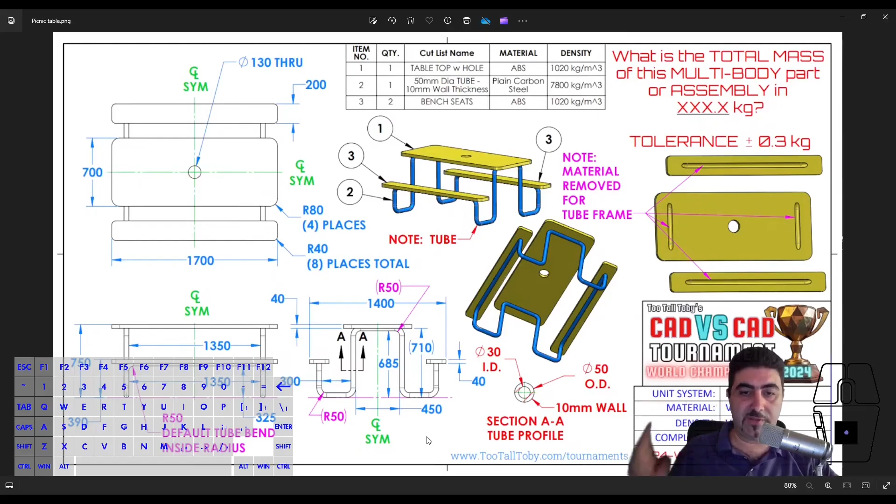So I'll just put this here on the side, and we're going to start a new assembly. I'm going to call this the picnic table—well, the TooTallToby World Championship picnic table. And we're going to start making parts.

So I'm not going to be inserting any parts, of course, I will be making them. So these are the benches. By the way, in a speed modeling setting, I wouldn't be naming everything. I tend to want to put Solid, that's my style, at least when I'm competing—you can check by my successes in TooTallToby's competitions that this might not be the best way to do it. But my style is let's start putting solids in there.

So I would start in the XY plane, and put a couple of rectangles for the benches. I want to make these equal there and there—sorry, there, these are equal. This is vertical, and then this is midpoint with 3 points, so okay, then I want a midpoint here as well. Now, dimensions.

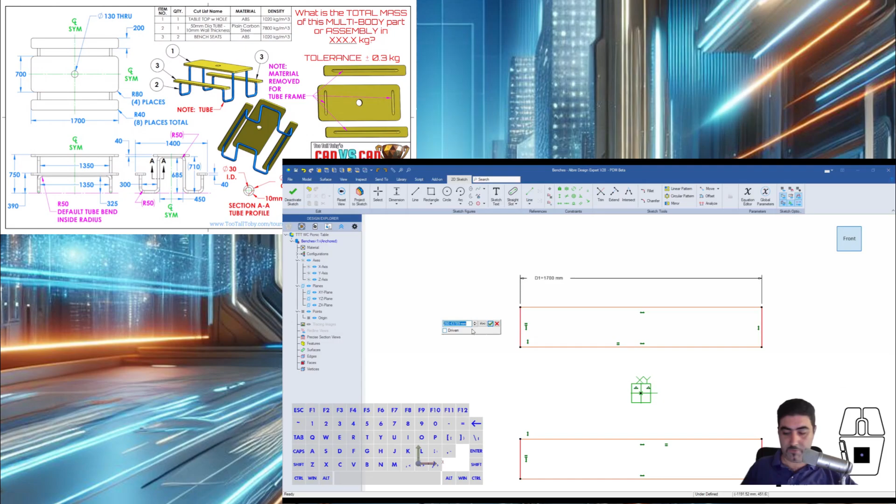So this is 1700, and this is 200. And what's the outer one? Well, the outer one is on the bottom in the center of the sheet. In that view it says outer to outer is 1400, and it also tells me that these are 40 millimeters thick.

Okay, so now I can start filleting, and the fillets are 40 millimeters. And we are done with the benches for now.

So now I want to do the tabletop. So we want a plane. Now we can see, bottom left, the top of the benches is 390 from the ground level, and the top of the table is at 750. Now what that tells me is subtract them and offset my plane, that should be fine. So I'll just say here, 750 minus 390, and that's where I'll design my tabletop.

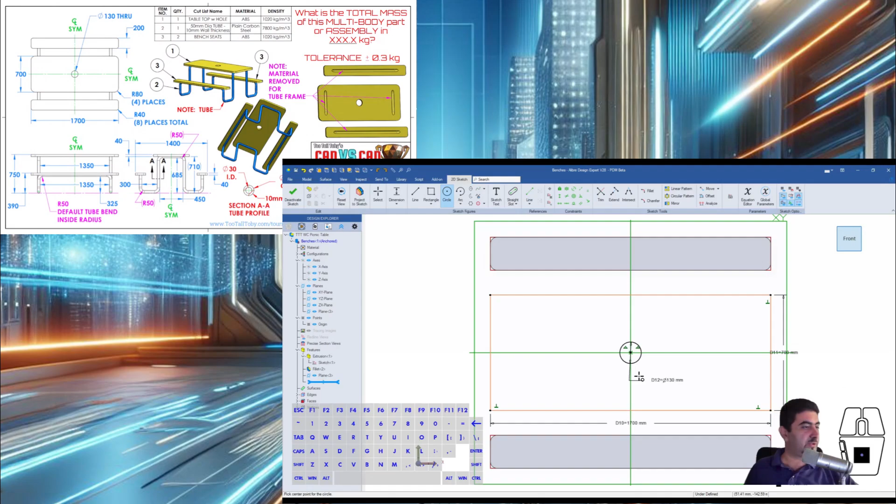So my tabletop is a center rectangle, which is also 1700, but 700 this time, and it's got a 130 millimeter circle in there. I'll extrude that for another 40, and then I'm going to fillet it.

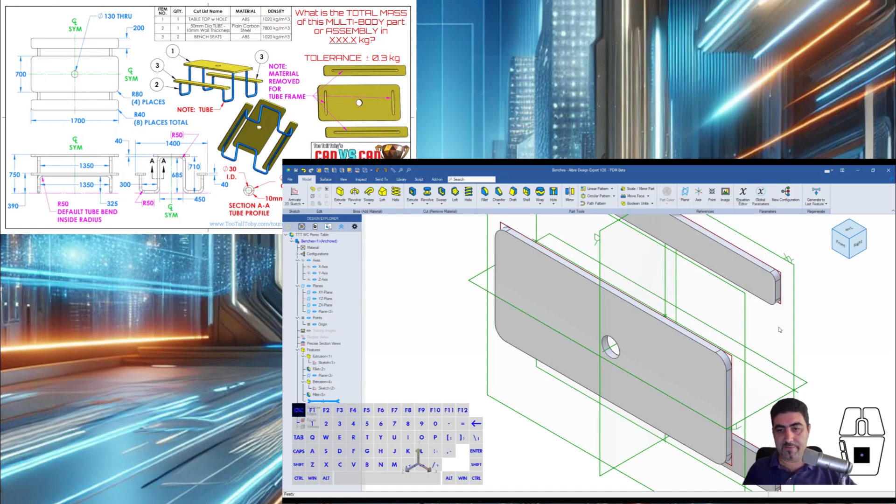Now, in speed modeling, I've come to the conclusion that this is a slightly faster way to fillet, so this is how I do it: you select the edges first, holding down Shift, then you open the fillet, type the number—oh sorry, it'll be 80 this time—then hit Enter, and you're done. You just filleted everything. So this is the benches and the table done.

And they're anchored because I didn't insert the part. I created a new part, and it was the first part of the assembly. So Alibre automatically anchors them, which is fine by me. That's how I want it.

Okay, so now I'll go back into the assembly, and now I want to be doing the tubing, and that is the hard one, right? That's the difficult one. Okay, so how do I do that?

Let's see, if all of the fillets in the tubes are the same, which they are, you can see that the fillets in the tubes are marked with a purple R50, and in the bottom left it says R50 default tube bend inside radius. Inside. So all of the bends in the tubes are the same.

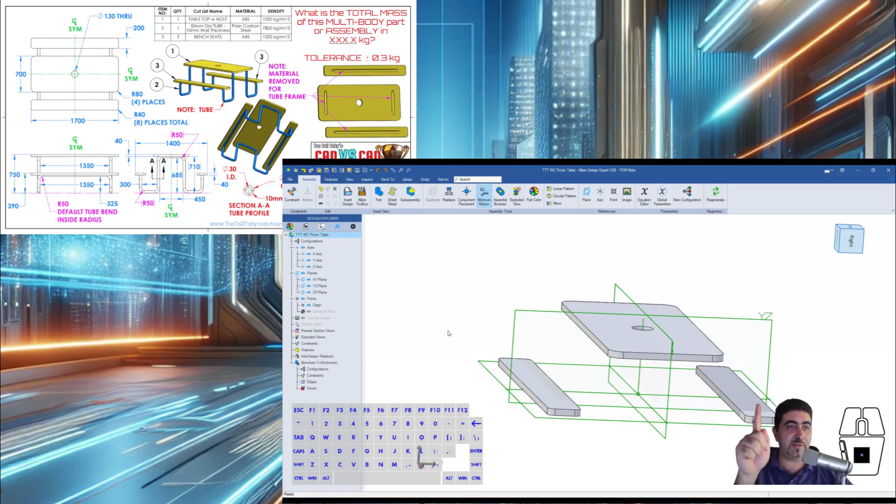Seeing that, I would just go for a 3D sketch. You know, honestly, I just go for a 3D sketch. But we need to pay attention here, because I'll be sketching the center line. What this means is that the center line for the bend is not 50 millimeters. It is 75, because 50 is the inside radius.

So let's do some 3D sketching, and before I do that, I need a plane to start on. Let's see, bottom left we have 1350 between the legs inside dimension. That tells me the center line is at 1400 millimeters. So I'll make a plane here and offset it by 700. That's where I'm going to start my 3D sketch.

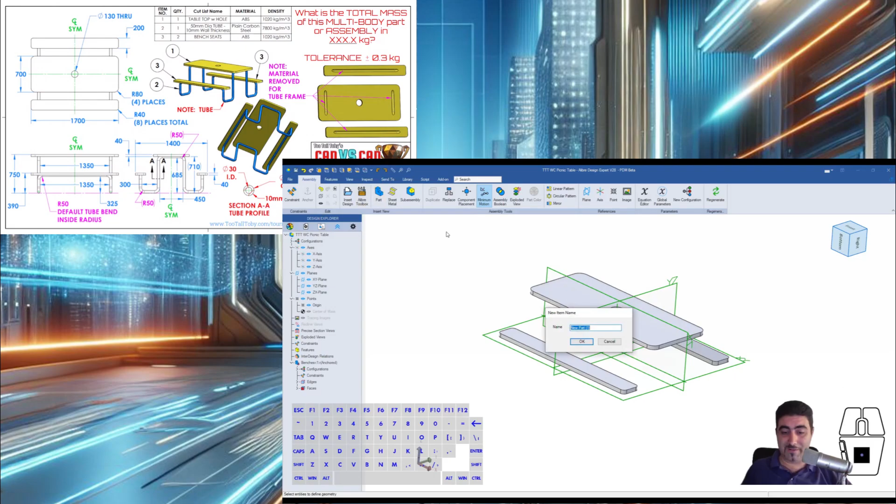Sorry guys. Now this would have cost me a lot of time. In a speed modeling situation, I need to start a new part first and then do all of that.

Okay, so now I'll come in here and 3D sketch. And if you remember my video on 3D sketching, we always need to have the grid on, and we always need to have the elevation window showing, which I will put here in the center for you. You might not be able to see it very well, but if you want to follow along, you can look at your own elevation window.

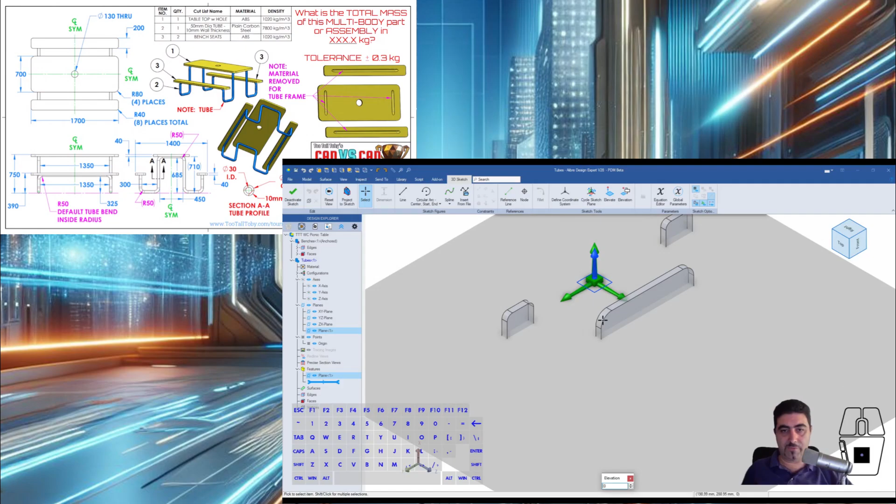Okay, so I'll just draw a random line. I'm going to make one point coincident to the origin, and it's way back there. And then I want to make that line parallel to the x-axis. Okay.

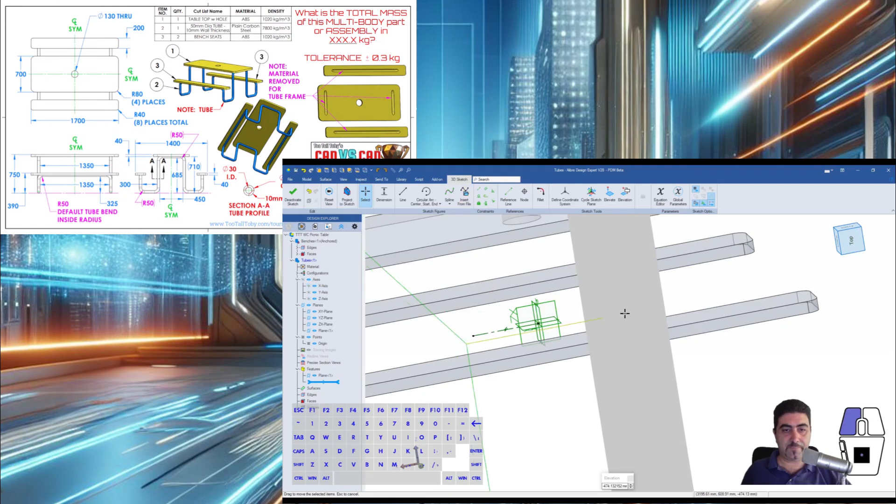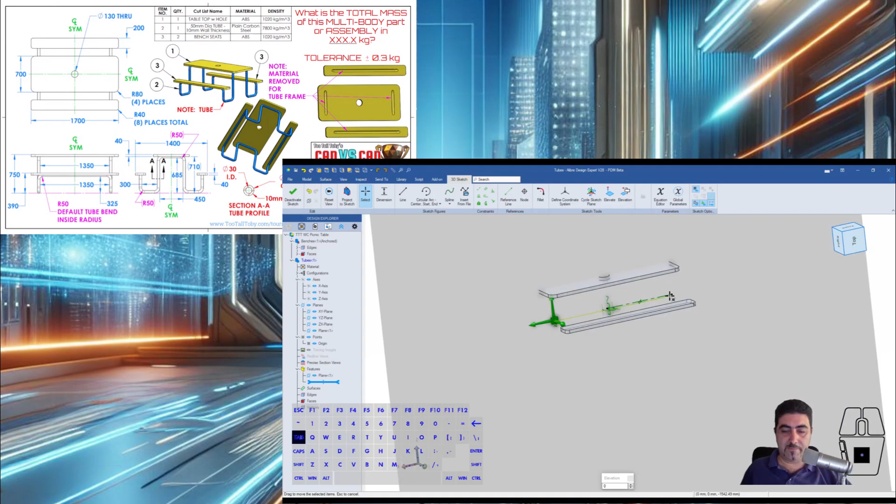Cool. Let me switch my plane so I can move this. Now I can move it along this plane. By the way, the reason I created a plane is because I want to start from here. So I was going the wrong way, right? So you need to switch planes to move things. Okay, there we go.

And now I can dimension this to be 700. Okay, that's cool. And then I'll click there, go straight up. So I need to dimension that now to be the difference between the bottom of the benches and the center line path of the tube.

So we need to check our print again, right? The bottom of the benches is at 350 millimeters from the ground. And the center line of that tube in the middle, right up there, is 685 plus 25, so that is 710. So what I'm going to say here is I'll start the dimension and say 710 minus 350.

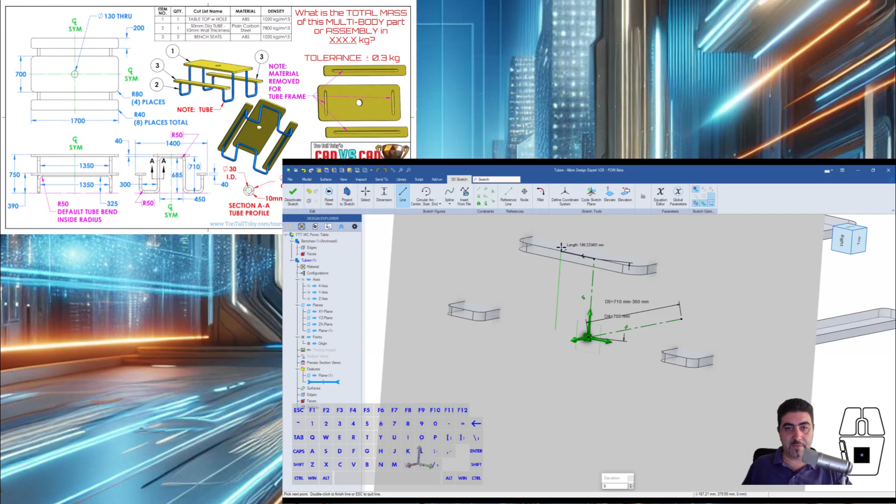And that's where I can now start sketching actual geometry lines. Let me put it to one side. Okay, now I can start doing lines. So I'll click there. And you know what? I will hide my benches. Okay, I think this is easier. I don't want to be snapping to random stuff.

So let's go there, and then to the top, and then I pick that up. And I'm doing this little circle and then picking that point, and you see that the elevation just snapped to the number that it should be. By the way, you know what, I'm not going to gimp myself.

I'm just going to dimension all of this first. So I'm just going to dimension everything first, because I want these straight lines to be in the correct location from the start. So now I'll be dimensioning this.

This is half of the width of the center line. We already discussed why that's 500, so that's 250. Okay, and then these two are vertical. Yeah, they are, they already are vertical. So that is then a height of 685.

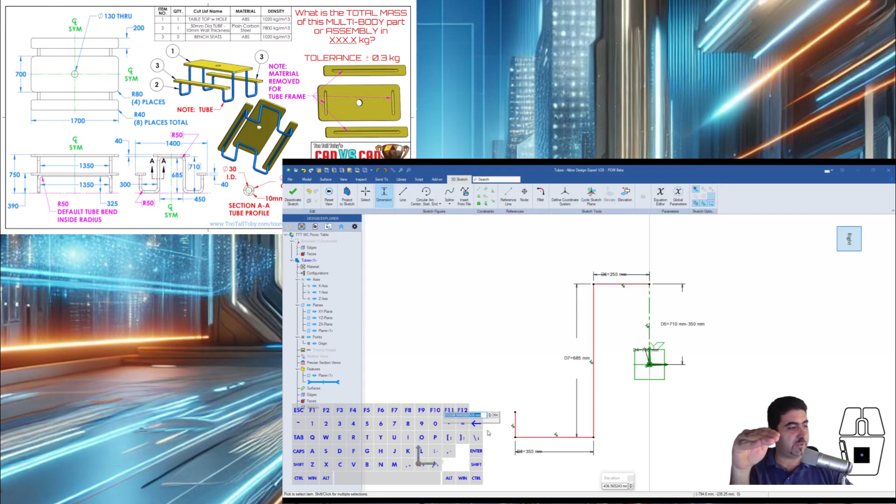And then I need to dimension this height. I'm going up again. So now I'm getting a dimension from the ground, right, to underneath of the tube. Okay, so that's 325 again, exactly, right? Because the bottom of the tube is touching the ground, so that's below to below. So you just shift that.

That's the correct one. Okay, so now what I'm going to do, now I'm going to just make a line here. Make sure that it's in a primary direction that's perpendicular to the other ones. And I will just say that this is, you know, D4.

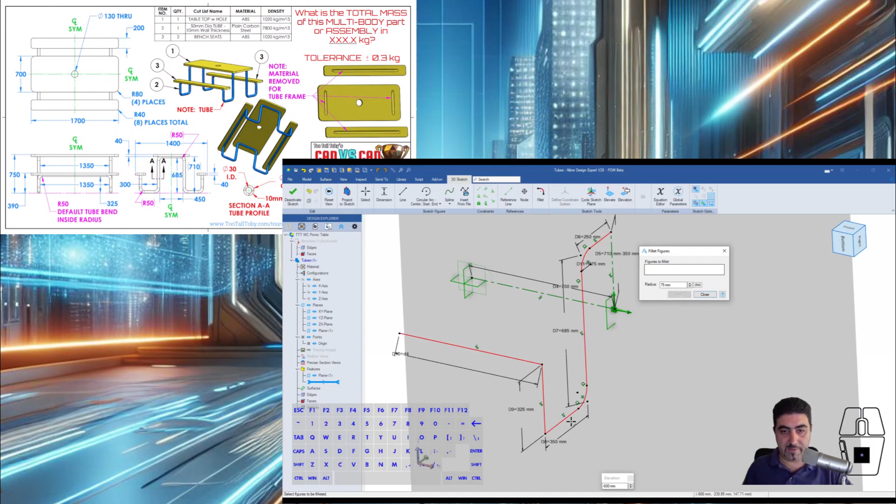Okay, and now I'm going to fillet everything. And we said that we want a fillet of 75. So I'll just type that in, go in here and say apply, apply, apply, and apply. Okay, so I'll close this off.

While it is selected, I'll open up a plane. It'll snap it to the middle, because now when I sketch on this plane, I'm getting an origin which is at the point that the sketch I used is piercing that plane. Right, so this is a sort of poor man's piercing constraint.

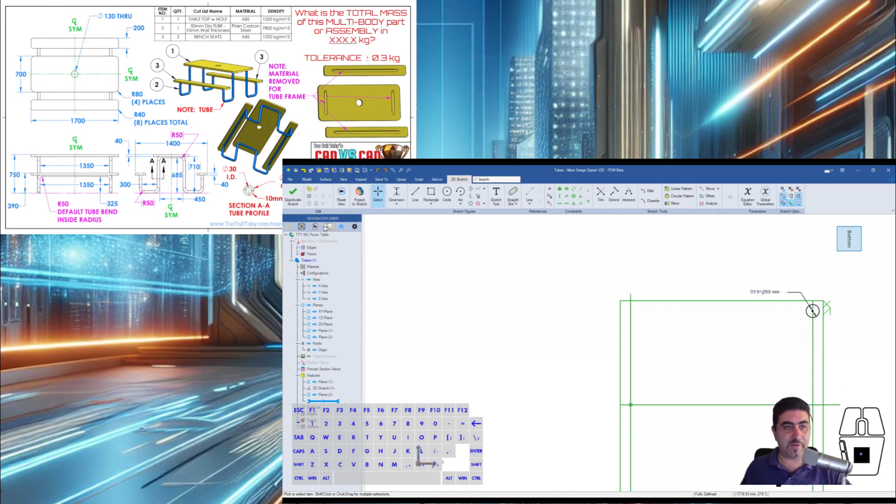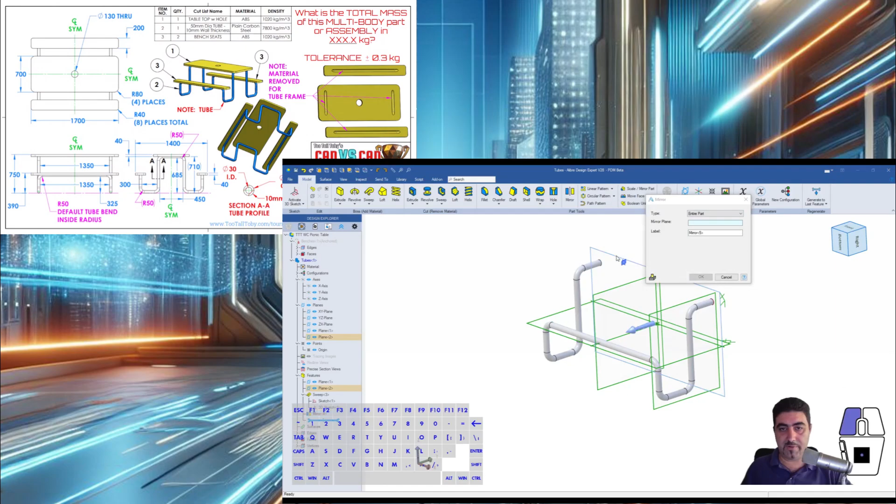And I'll do a tube of 50 millimeters, right, and not do the inner diameter yet. So I'll just do that. Sweep, select this. So I've done a quarter. Now I'll mirror the entire part there. And now I'll mirror the entire part over there. So these are my tubes done.

Now I'll bring the benches. I'll show the benches again, okay? And they're interfering like they're supposed to. So look what I'm going to do now.

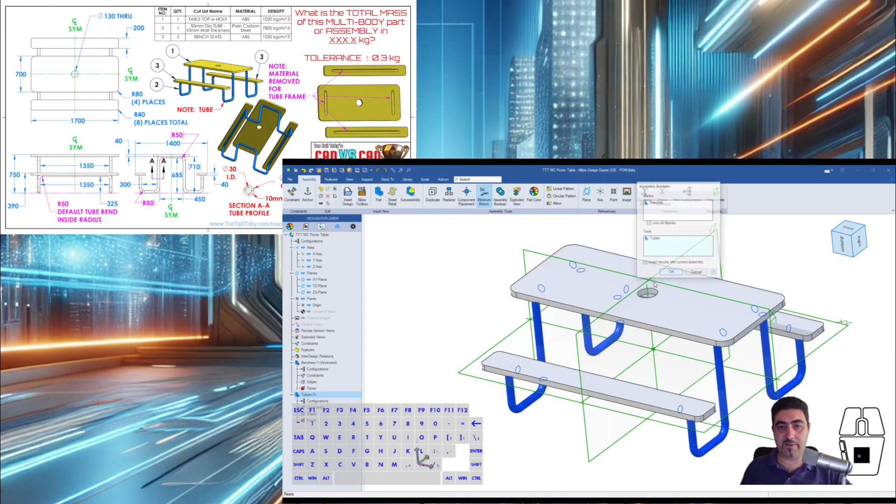I'm going to do an assembly Boolean, okay? So which one is the blank? Well, the benches are the blank. And the tool, well, the tube is the tool, okay? And I'll check that I want to insert the results of that into the current assembly. So I'll insert that. This is the assembly Boolean. Now look at this.

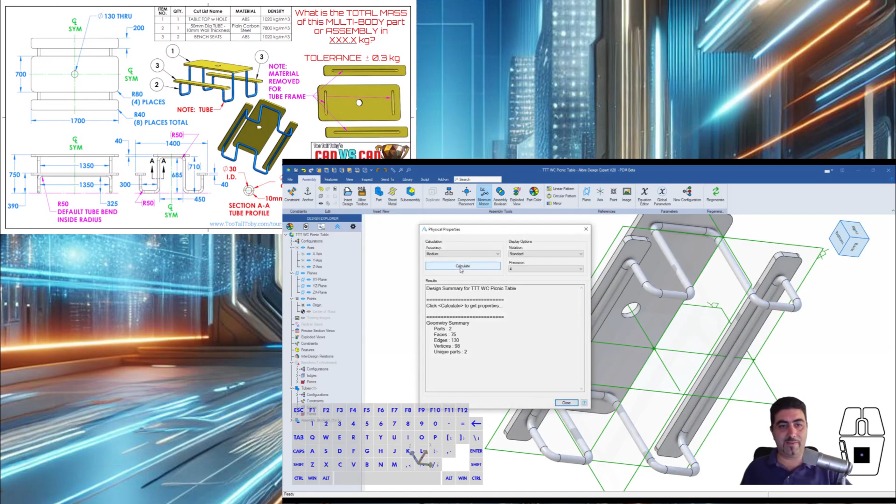I will be suppressing the original benches. Okay, looks like nothing has changed, but now if I hide the cubes, my cuts are in there and they're perfect. So now I can calculate that this has a mass of 87 tons.

Oh man. Now we need to go in here and assign some materials. So the benches, the material I need to assign is ABS. Cool. And for the tubes, look, for the tubes, right?

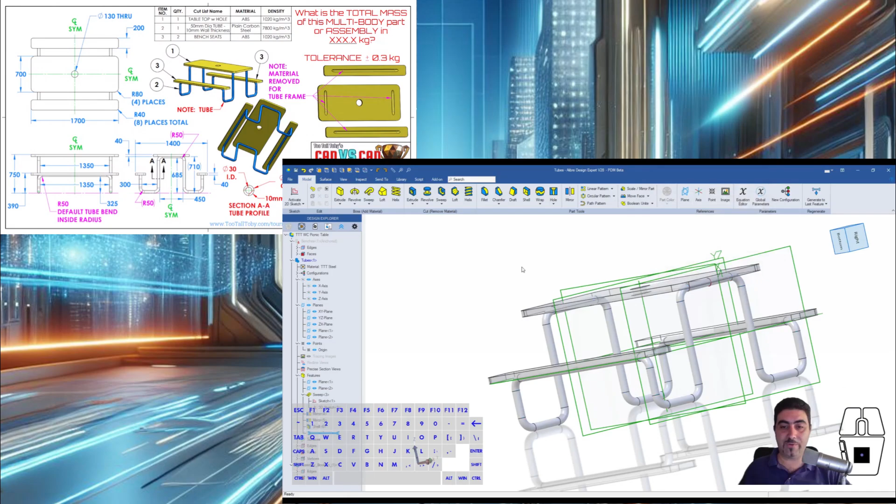I need to assign the material that it is steel, and then I need to shell for 10 millimeters without removing any faces. So if I click OK, now let's see what really happened, right?

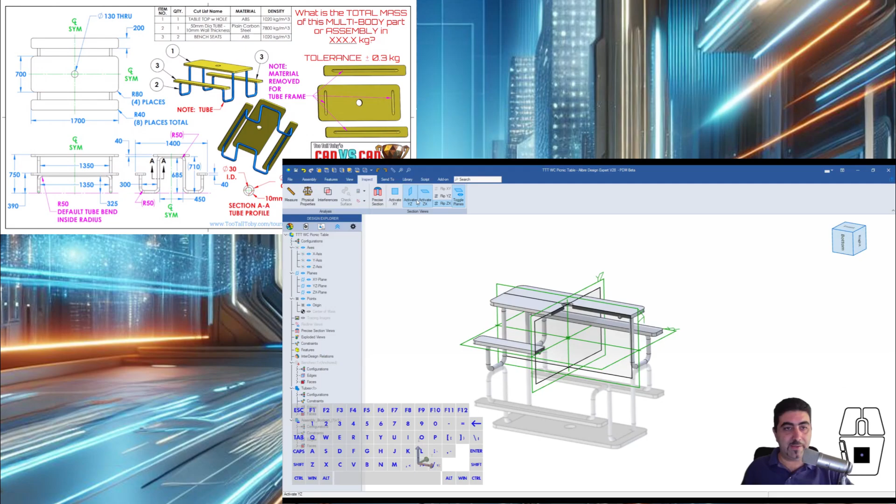So let's make a cut along the ZX plane. Flip it. There you go. It is now a tube, right? Because I shelled it, but I didn't remove any faces. So now it's a continuous tube, and, you know, same here, right?

Same deal here. So now I can actually check the mass, and the mass is 157.4, which, if I remember correctly, is the correct answer.

Now the next part we'll be doing is these weight wheels, right? And I was blown away.

I wanted to do that so much, but unfortunately, Chris, who got to the final, knocked me out in the first round. Thanks for that, Chris. By the way, his YouTube channel is Fully Defined.

Check him out. So what are these? These are weight wheels, right? And there are 3 of them, and you need to come in with the weight of all 3 of them.

And there's a very handy note here on the bottom left that says these are the only dimensions that change. So it's the outer diameter and the thickness. So this inside fillet, this angle here, and the distance from the inner wheel all stay the same.

So how would you go about drawing this? Well, we have this very, very handy section here. So, I mean, this is like telling us, look, start from there. So I will start an assembly, and this is the trick here, right?

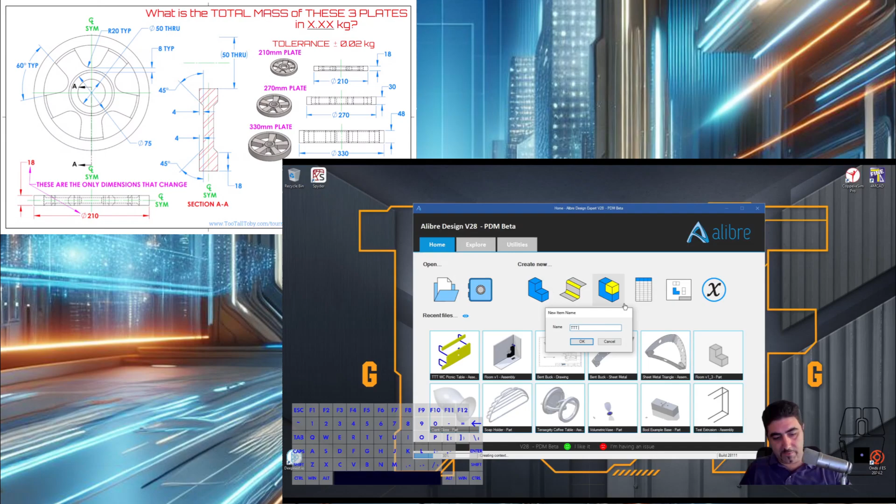I'll start an assembly, and I'm going to call this TooTallToby World Championship Weight Wheels. So again, not inserting anything. I'll start a new part, call it weight wheel. Okay, and I'll start sketching here on the YZ plane, and I'm going to do this.

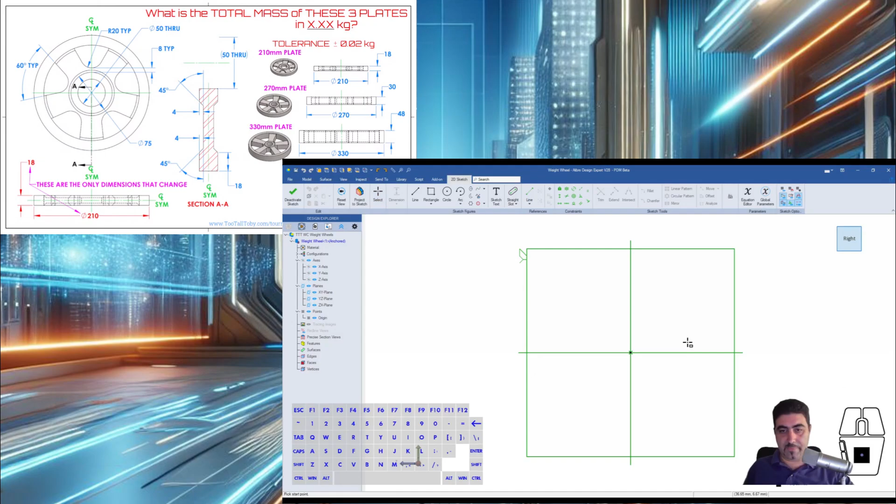I'll start a rectangle, make these 2 into reference. I'll just say this 3-point constraint midplane, and this distance is 25. Okay.

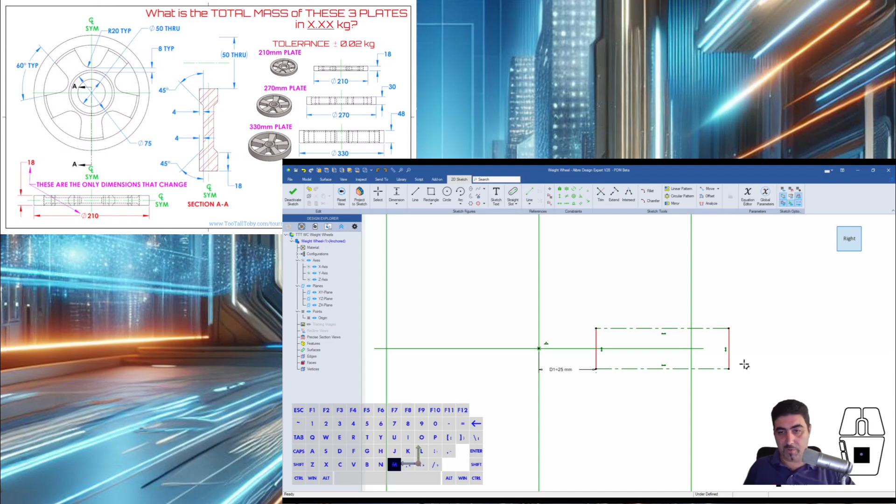Now I'm going to do, I'll start with a small one. Okay, so the small one has a diameter of 210, so I'll divide it by 2. Okay, and it also has a thickness of 18. Okay, now I just need to do this.

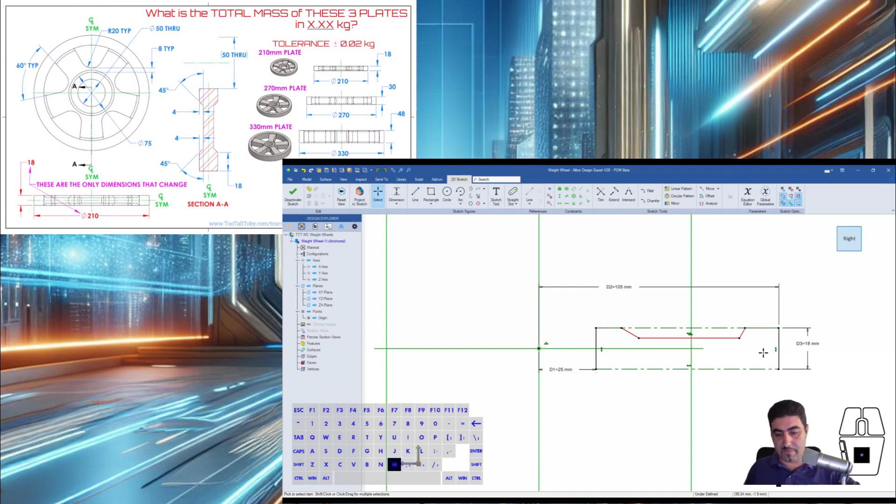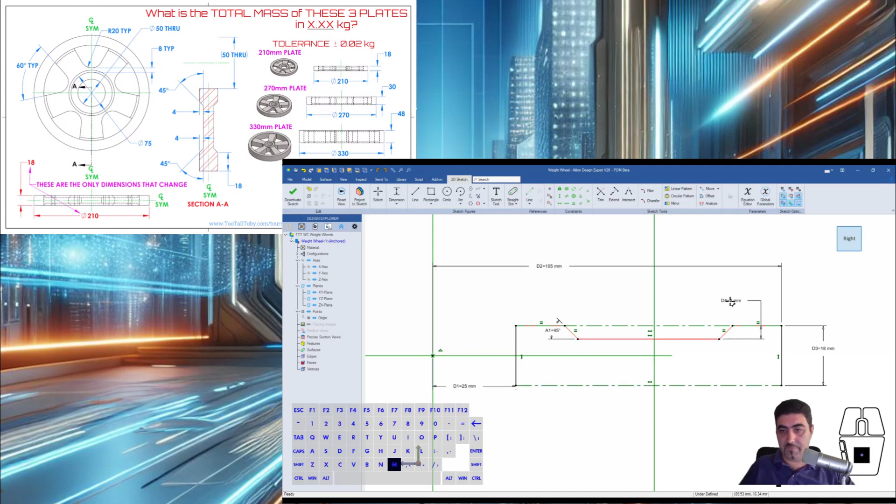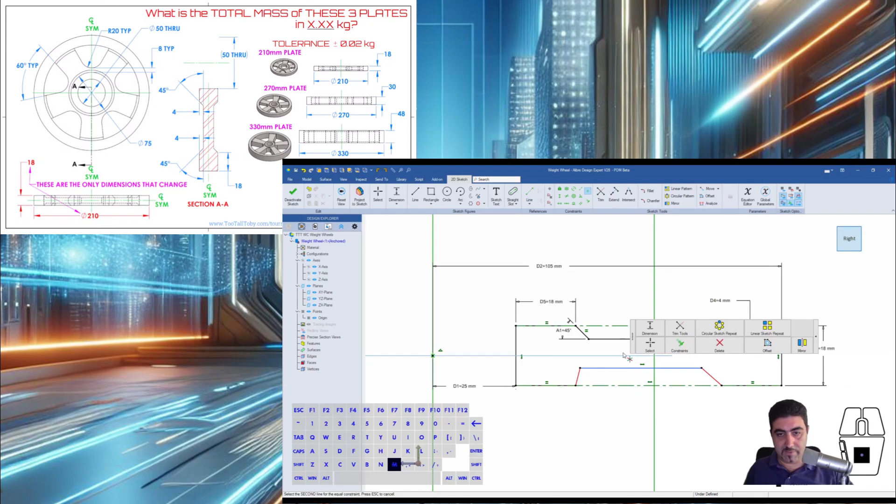I want to say that these two are equal, and I also want to say these two are equal, and this is a 45-degree angle. This is a depth of 4. Okay, and this is 18 millimeters. So I'll do the same on the bottom. At this point, I just need to be making equal constraints, and I'll just give a midpoint here. Okay, so I've got my profile now. I'll open up my hurl bar, and I'll just do a revolve around the y-axis.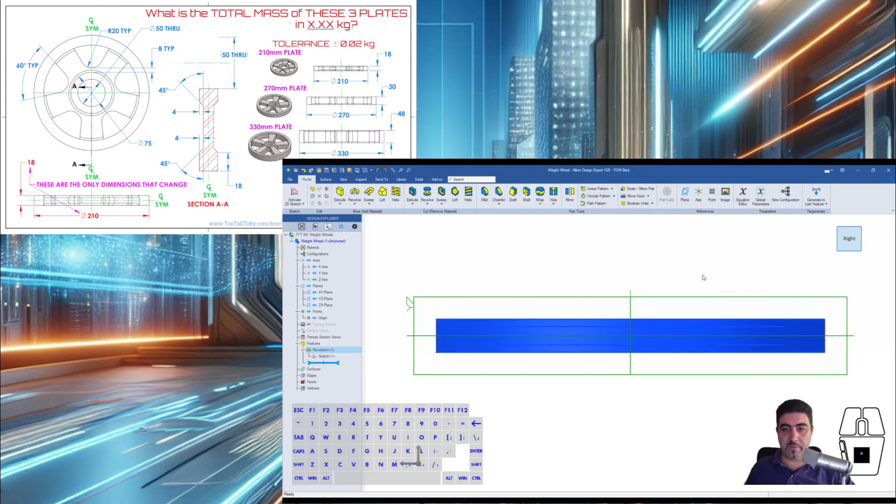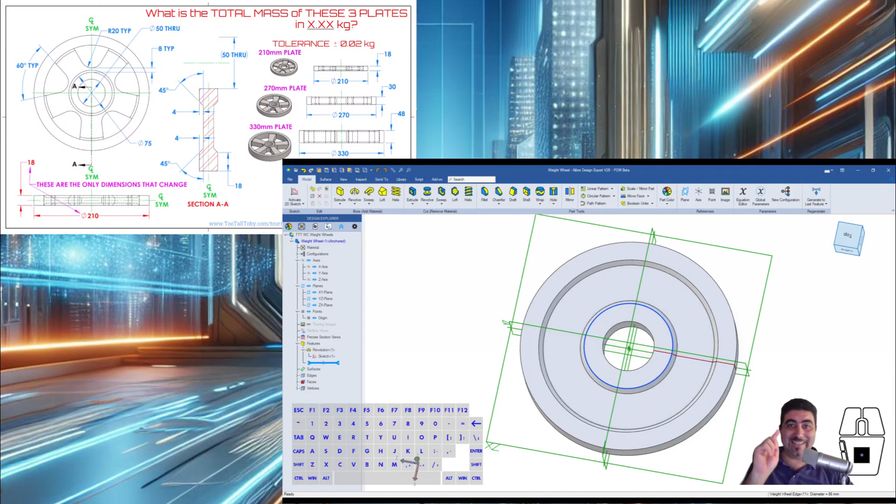Okay, and now I need to take my cut. So it seems like the cut ends at this circle. Why am I getting this? Well, I'm following the dimensions, so this is supposed to be right. Let's see, is that 75? No, that's not 75. What is 75? How is that 75? You have 50 plus 18 times 2. Oh, you don't have that. Ah, see? TooTallToby caught me there, again and again. So look, guys, these are not equal, right?

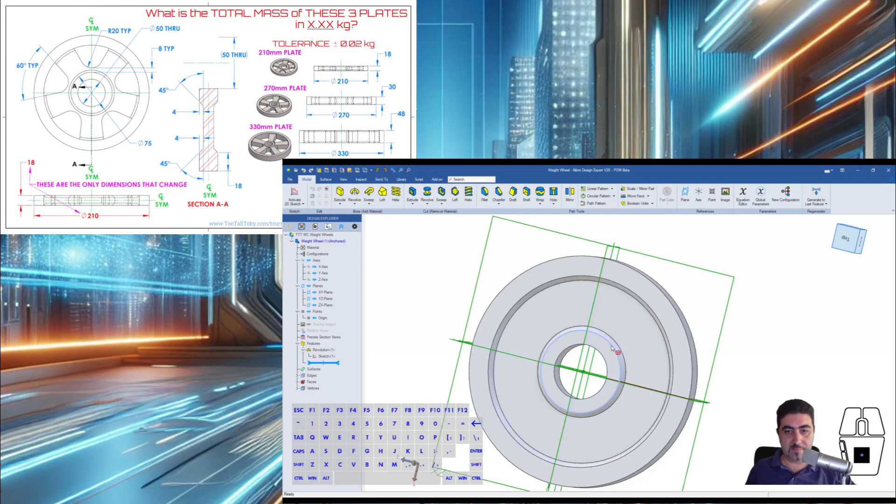So let's see, yeah, so these are 18 millimeters, but these are not. So I'll just give a vertical constraint there. And I'll say that this is, oh come on. I need this to be at a diameter of 75. Okay, so what did I miss here? Yes, another vertical, that's it. Okay, so if I do that again, that's 75. Okay, that tracks. Cool, good to go, I think we're good to go.

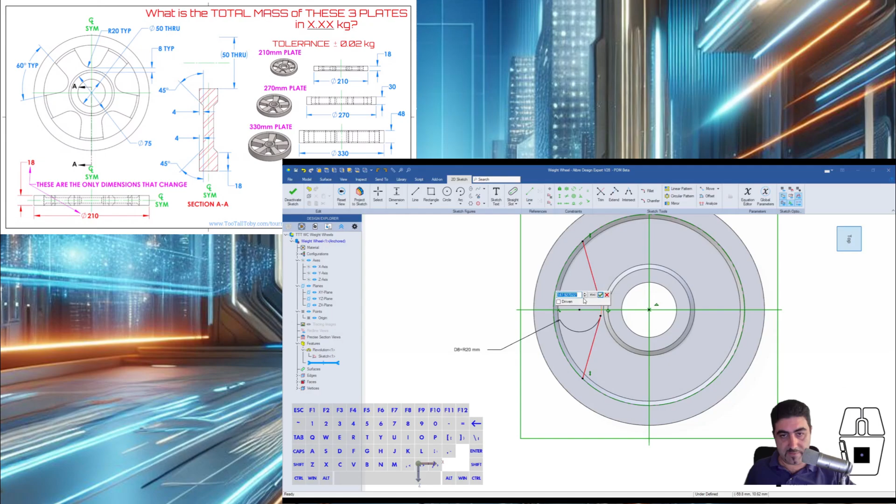Now I'm going to just sketch here. I'm going to imprint this one, right? And line, tangent arc, line. Okay, so make everything symmetrical to the origin. Let's make these two vertical, and I need to make this an R20. Is it? It is. And these need to be 60 degrees apart.

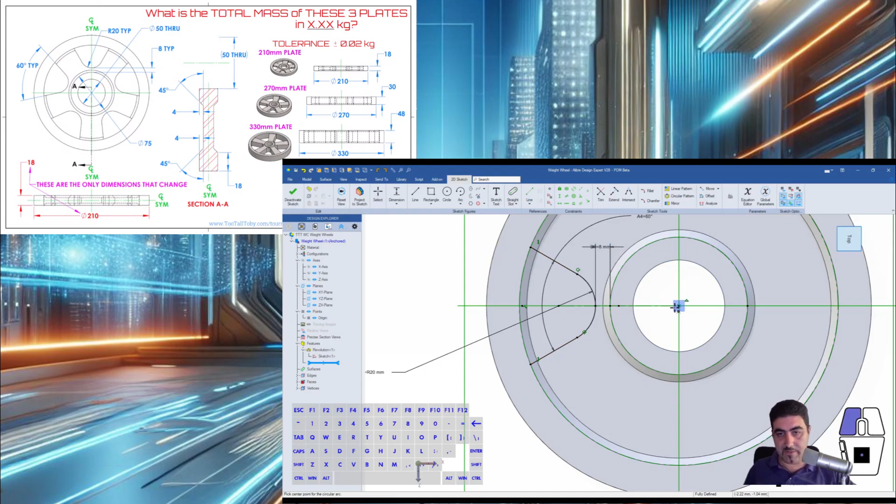And this needs to be 8 millimeters from here. So I want number 4. That's 8 millimeters. And now I need a center slot to cut this cut off. And I'm just going to cut through all circular pattern 5 times. Okay, so that's the smallest of the wheels done, right?

So how would you go about making the other two really quickly? Well, you would make configurations. So that's config 1, that's config 2. If I was making actual parts, I would deselect all and say that these configurations only vary in terms of parameter values. In a speed modeling situation, I wouldn't bother.

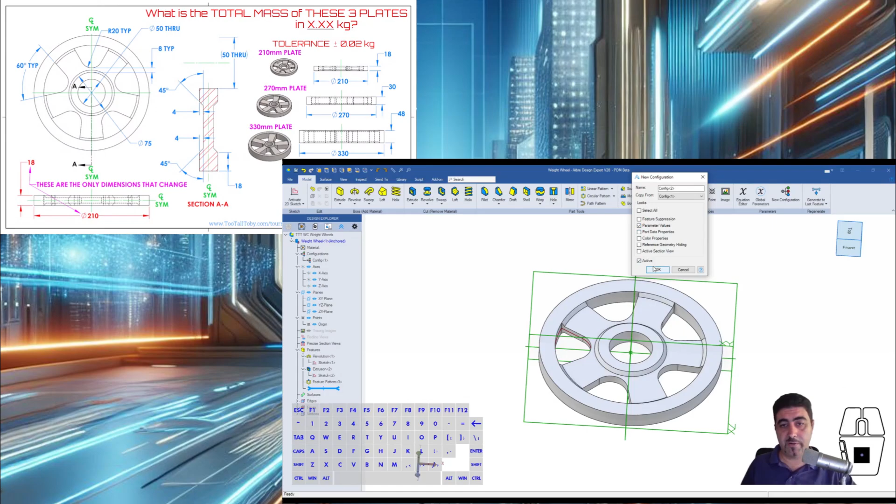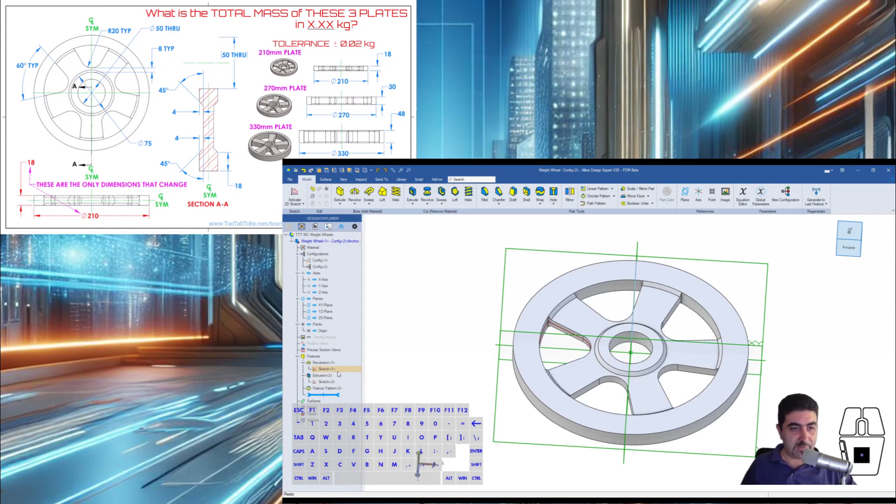Make it active, right? And okay, go into the sketch and say that the 210, so this value now becomes this, and the 18 value now becomes 30. Okay, that's done. That's done wrong for some reason. Why is that? Well, I need this to continue being... so how did that happen? This needs to be 18. I must have messed up there for some reason. Okay, so that's config 2 done.

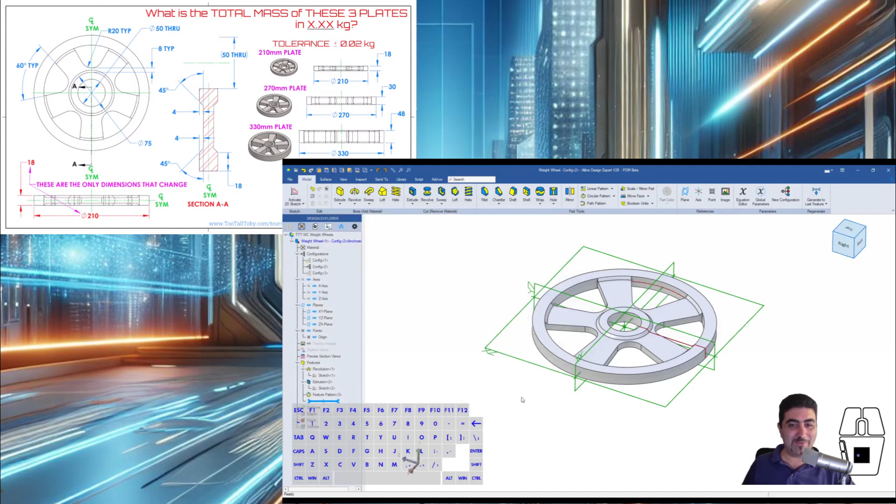And then you need a new one, config 3. You go in here again and you tell it that this now is 330 divided by 2. Ah yes, I got the wrong 18, that's how I did that. Oh, which means, oh, I messed up. So let's go in here again. So this becomes 30, not this one. This becomes 30, and this becomes 2. Okay, so now this is correct.

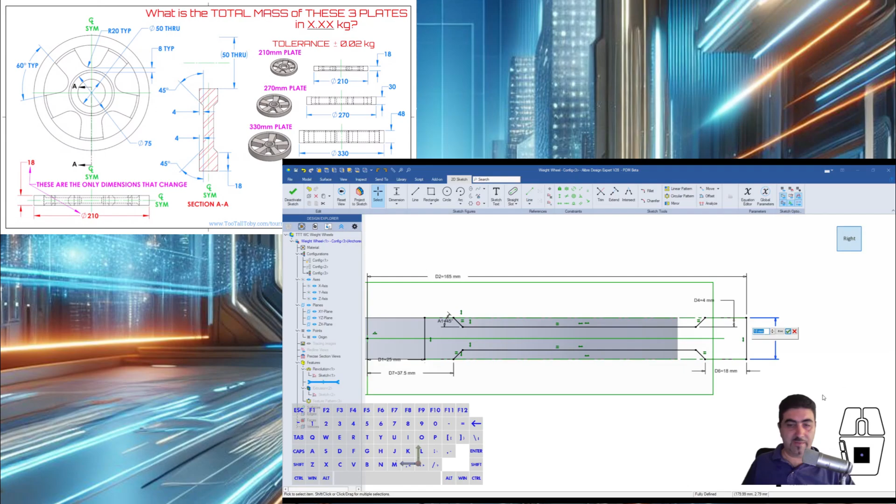Okay, now let's go into config 3. You know, let's just go into the sketch, it seems like it's easier. And we'll make this 330 divided by 2, and we'll make this, what is that, 48.

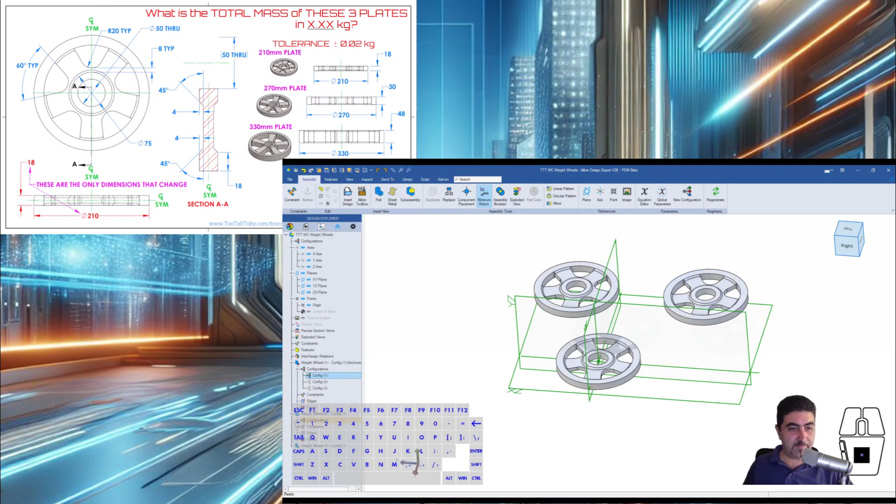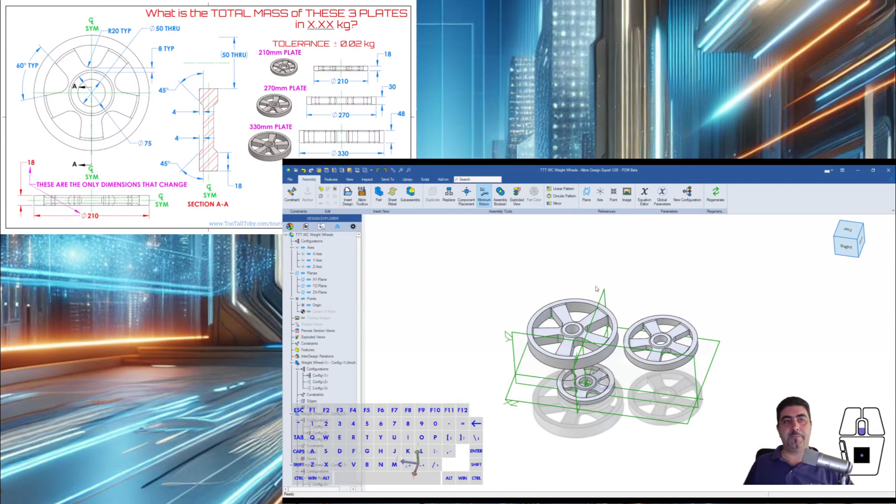So now we have the 3 configurations, and we're going in here. I'll make 2 copies, and I'll say this copy is config 1, this copy is config 2, and this copy is config 3. Okay, and now I'll get the mass. Again, let's edit, these are all the steel parts. Okay, let's get the mass. And I checked, and 25.31 is correct. So that's how you would do that.

So guys, 2 models from TooTallToby's World Championship finals, both assemblies, and you had configurations, you had assembly booleans, you have 3D sketching. TooTallToby was amazing this time, best models for finals ever. Congrats, TooTallToby, and I hope you liked it.